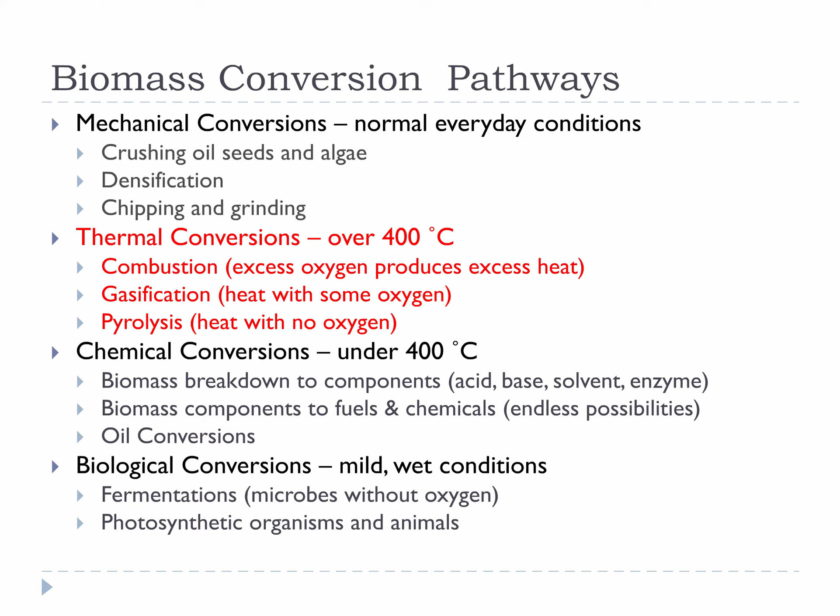Please take a moment to review this week's learning objectives. This week we are covering thermal conversions, our second biomass conversion pathway type. There are many different types of thermal conversion products. Thermal conversions can be used to produce solid, liquid, and gaseous products, and a wide variety of each type depending

on the reaction conditions. Unfortunately, it can also be a very confusing field because a lot of the same products have different names that would lead you to believe they are not even related. Some of the names of common products are shared here, and as you learn more about thermal conversions, you will better understand what they are and what they aren't.

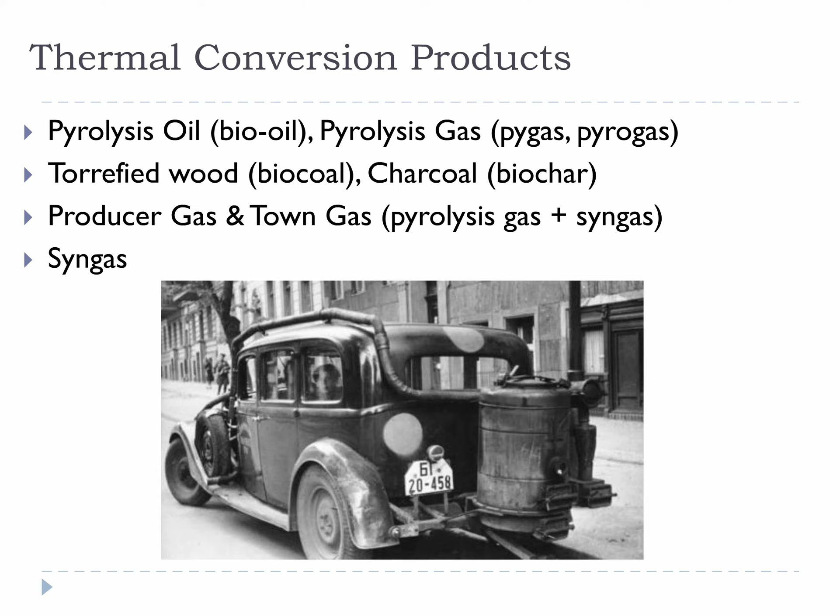I am going to repeat myself here because this is very important. When we think about thermal conversions, it will be important to think about heat and oxygen. This is because heat and oxygen almost completely control what kind of thermal conversion will occur. As you add more oxygen and more heat to the process, you get different types of thermal conversion.

The lowest level of conversion is pyrolysis. It requires no oxygen and just enough heat to start getting biomass molecules to break, so around 400 degrees Celsius. The middle level of conversion is gasification. It requires more heat than pyrolysis, but importantly, it requires the addition of a small amount of oxygen, not enough to combust, but enough to lead to the formation of partially oxidized gas products.

However, each thermal process releases heat as well, so in pyrolysis a small amount of heat is generated, then in gasification more heat is generated, and finally in combustion the most heat is generated.

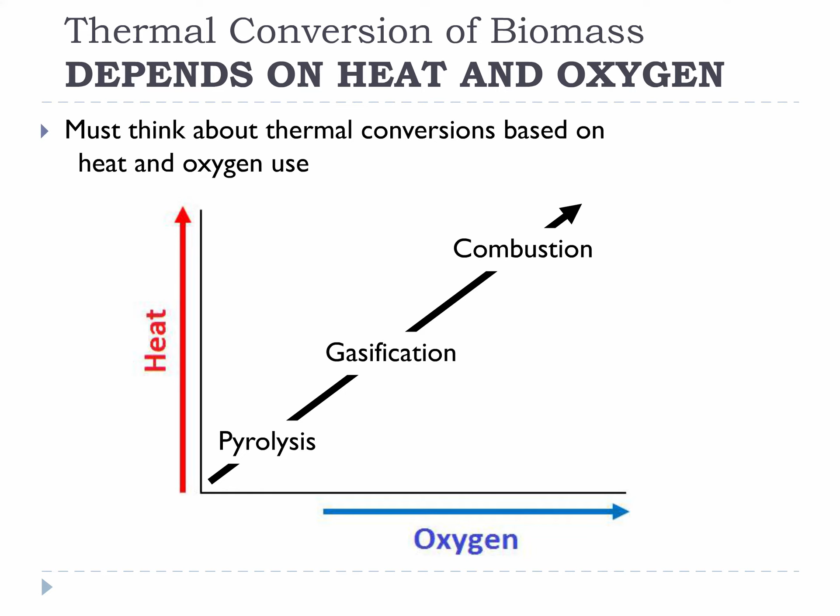The type of thermal conversion is defined by the desired product. If you want heat, you want to use combustion. If you want gas, you probably want gasification. If you want liquids and solids, pyrolysis is most ideal. None of the conversions is really good at making things other than its primary product, so it makes the most sense to figure out what the desirable product is and then find the appropriate process.

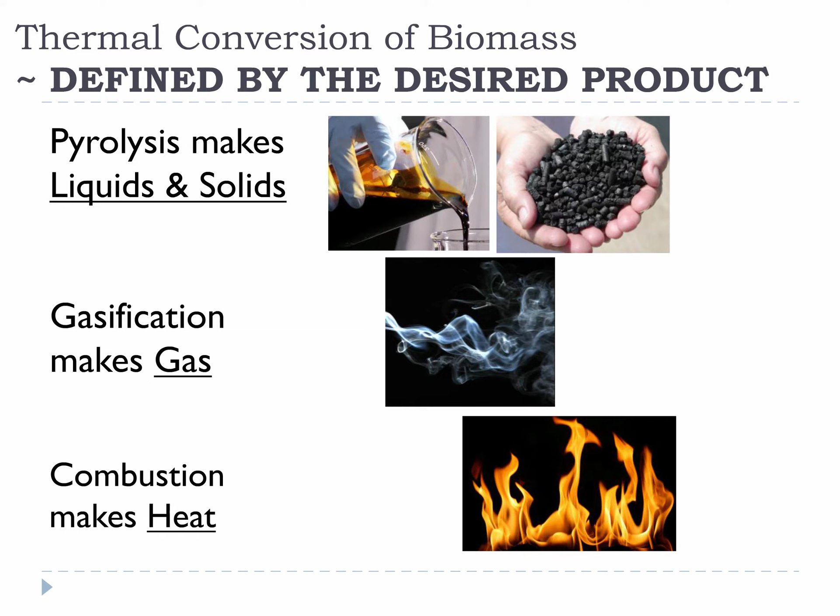Thermal conversions of biomass do not occur in isolation. It is almost impossible to separate biomass pyrolysis, gasification, and combustion entirely. All thermal conversions are optimized for a type of thermal conversion based on a desired product, but that only means that of the various products, the primary product is produced the most. It never means it is the only product. Remember, thermal conversions are a hammer, and their products are often a little chemically messy.

It costs energy in the form of heat to break wood down into a gas through pyrolysis, but as soon as oxygen is reacted with the gas, enough heat is generated from the formation of carbon dioxide and water to continue vaporizing the wood. So the cycle continues and the match burns through its wood until it is all gone and the match goes out.

To do thermal conversions justice, we have to do a little more chemistry. In order to make the diagrams and slides clear, we need to review what the chemical notation and molecular models mean. Please take a moment to read through this list and get acquainted with these very important chemicals and notation.

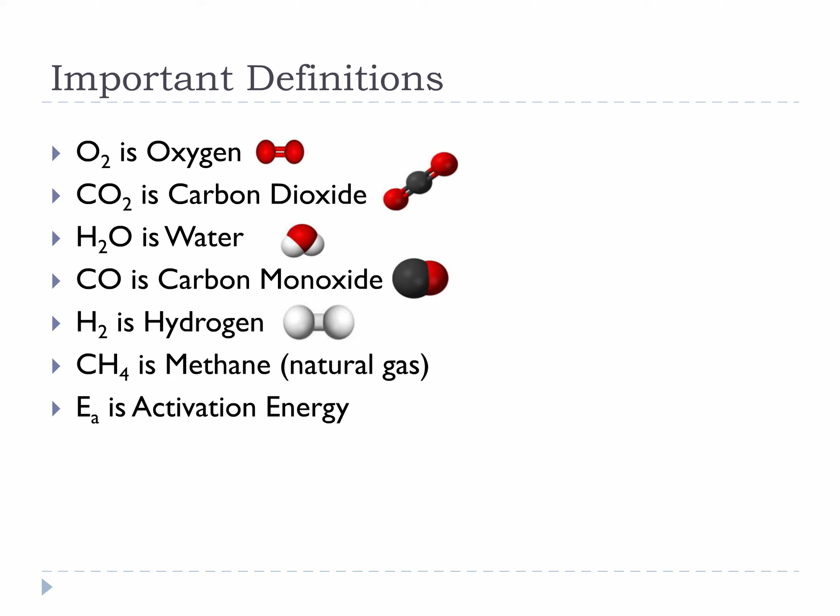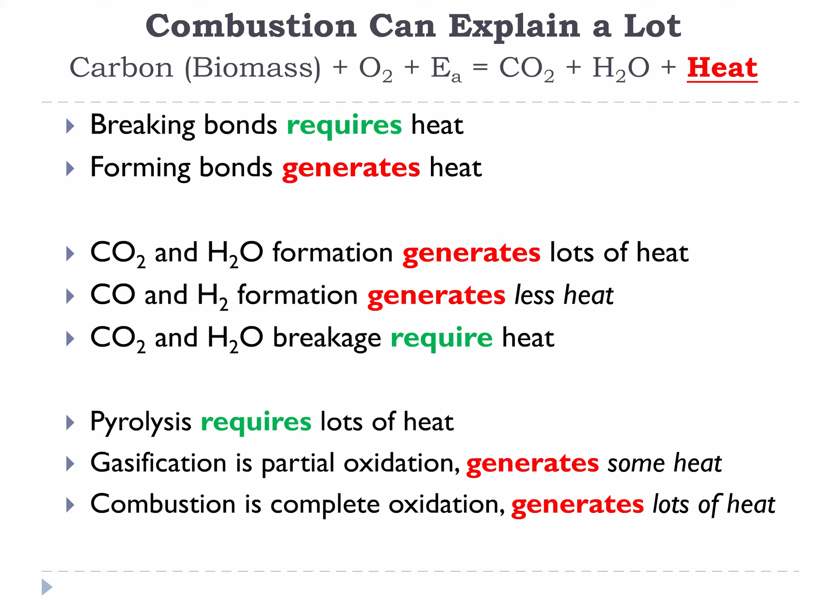Thinking about combustion can explain pretty much every thermal conversion. We will use the equations shown above to bracket all three types of thermal conversion and show how they relate and how they are different in terms of chemical bonds, chemical products, and heat production.

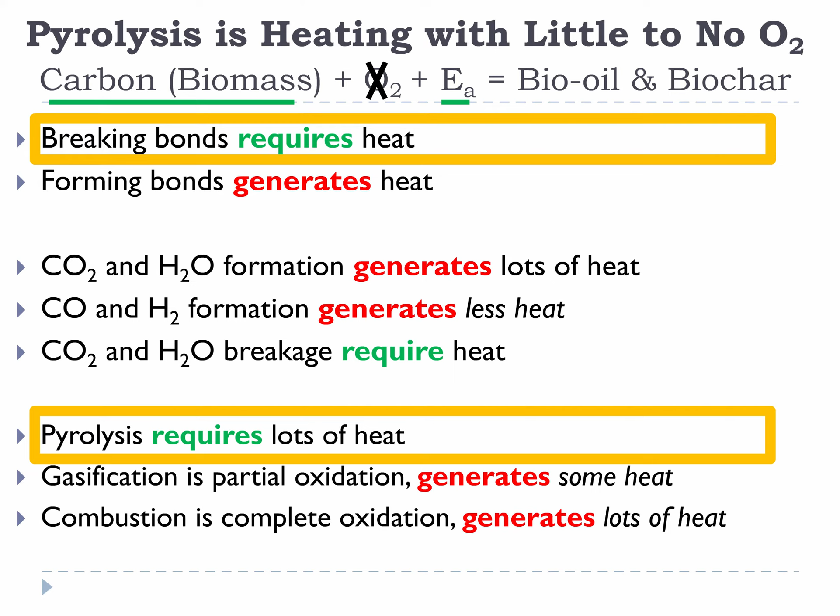Pyrolysis is heating with little to no oxygen. You still have activation energy, but you don't get oxygen, so pyrolysis doesn't get the benefit of forming oxygen bonds to make heat like the other conversions. Instead, pyrolysis is all about breaking bonds, so overall, pyrolysis requires lots of heat and does not generate it in excess.

Gasification is heating with oxygen, but not enough oxygen to make carbon dioxide and water. Instead, gasification forms carbon monoxide and hydrogen. Therefore, it gets some of the heat benefit of the bond formation, but not much. Gasification certainly generates more heat than pyrolysis, and in fact can generate quite a bit of heat if properly controlled, but not enough heat to be a self-sustaining reaction like combustion. Gasification is right in the middle between pyrolysis and combustion.

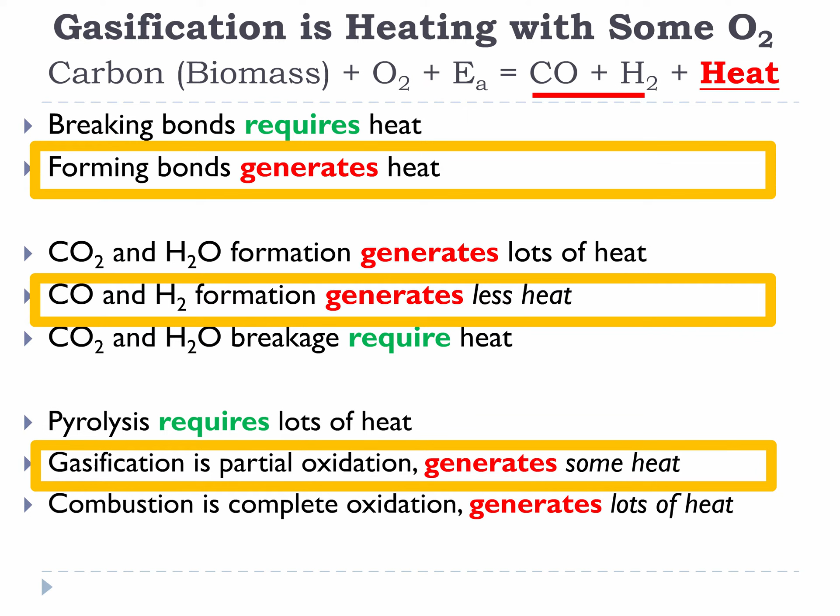Combustion is heating with enough oxygen to get maximum bond formation from the production of carbon dioxide and water. This generates by far the most heat, and enough heat in fact to be a self-sustaining reaction as long as fuel is provided, just like the match.

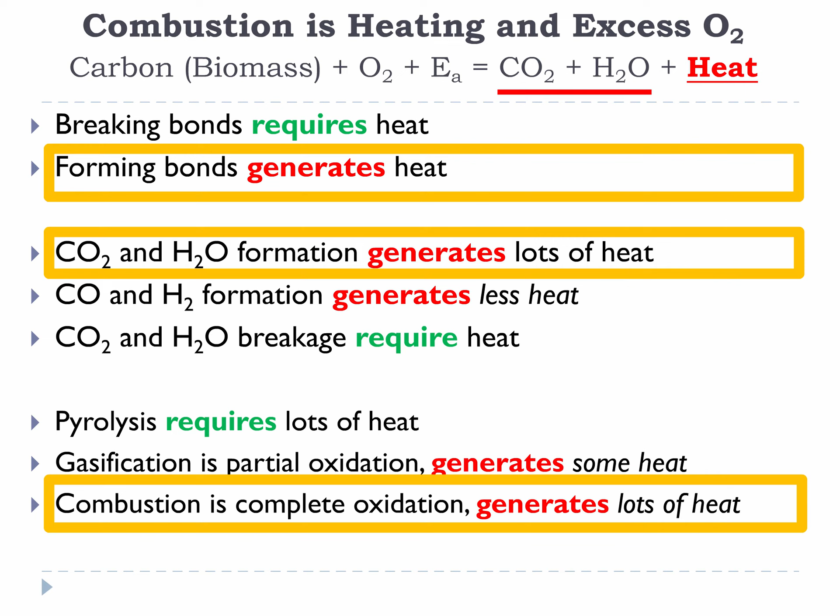Humans use combustion primarily for heat and light. This includes campfires, gas stoves, gas turbines, steam turbine power plants, hot air, hot oil, etc. If you really want to get crazy, look into why light is formed from a flame and how the colors change from combusting different things.

Another good puzzle is where the heat comes from. An increasing number of researchers believe, like Einstein did, that chemical reactions are capable of converting mass to energy at a very low level, and that is why they generate heat. The opposing camp says that this is impossible and has no explanation for the heat. It is a debate that will likely continue until we have the technology to prove otherwise.

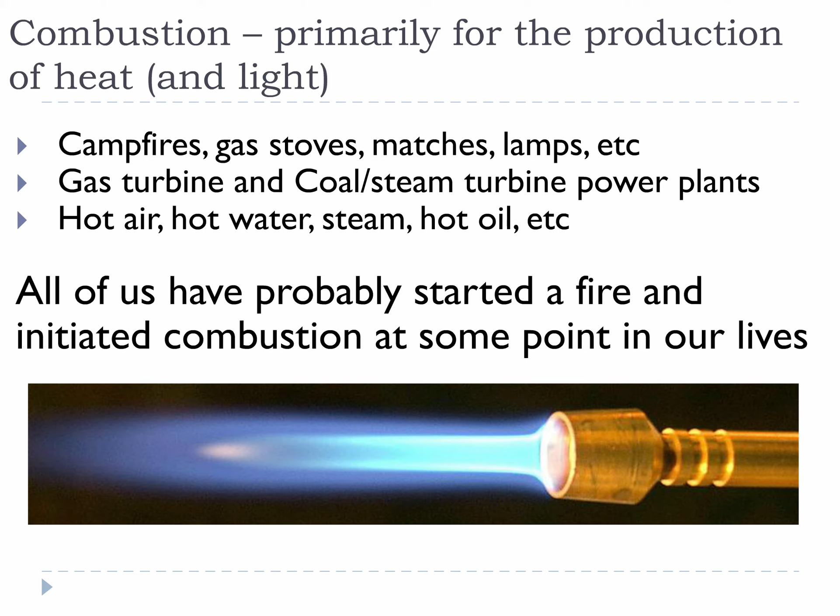In general, it is important that you remember that combustion products happen because of complete oxidation. This means they are primarily carbon dioxide and water instead of carbon monoxide and hydrogen. It is also important to consider what is being burned. If it is carbon-based, these will almost always be the products. But if it is not carbon-based, then there can be a variety of other oxidation products, like sulfur oxides, nitrogen oxides, and chlorides.

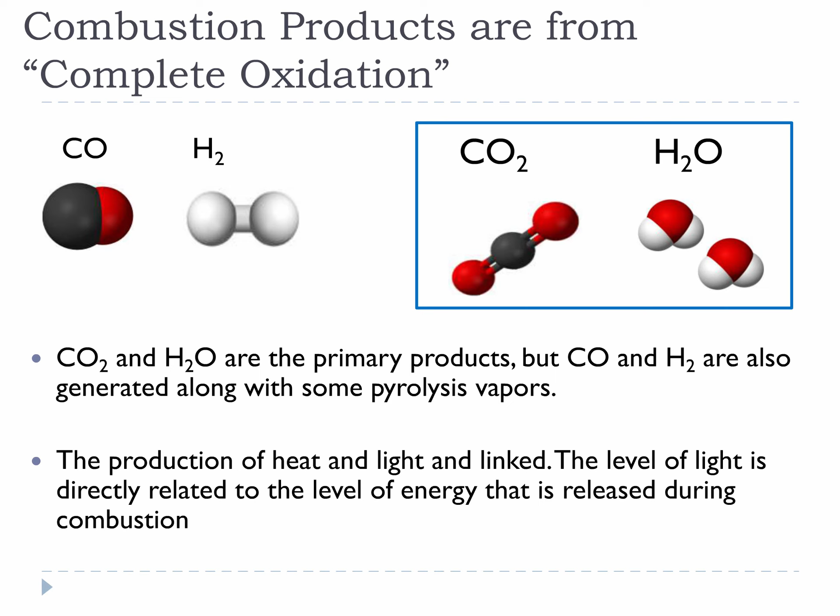I am going to repeat myself again because this figure makes a very important statement about combustion. Despite its age and simplicity, combustion is an ideal energy production reaction on Earth. Without question, the most widespread conversion from an energy perspective is combustion. We live on a planet full of oxygen, and combustion is king when it comes to making energy.

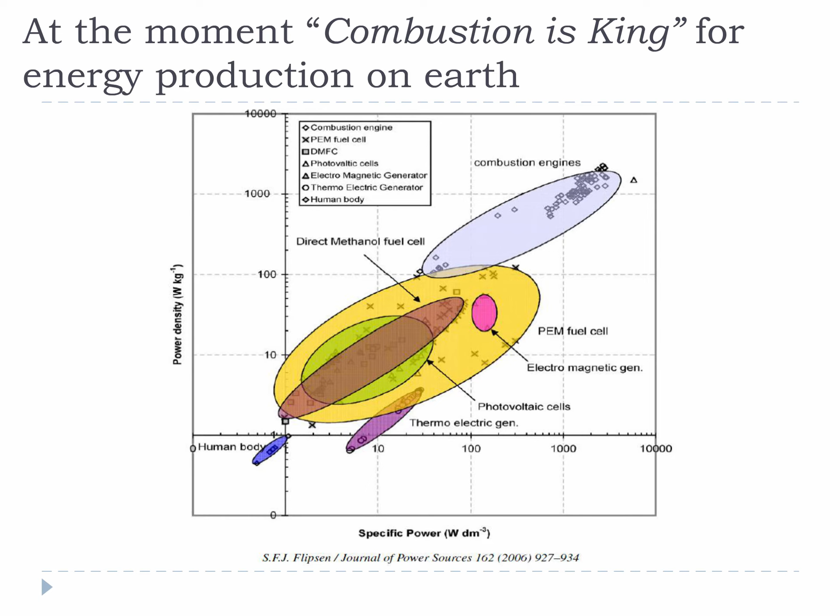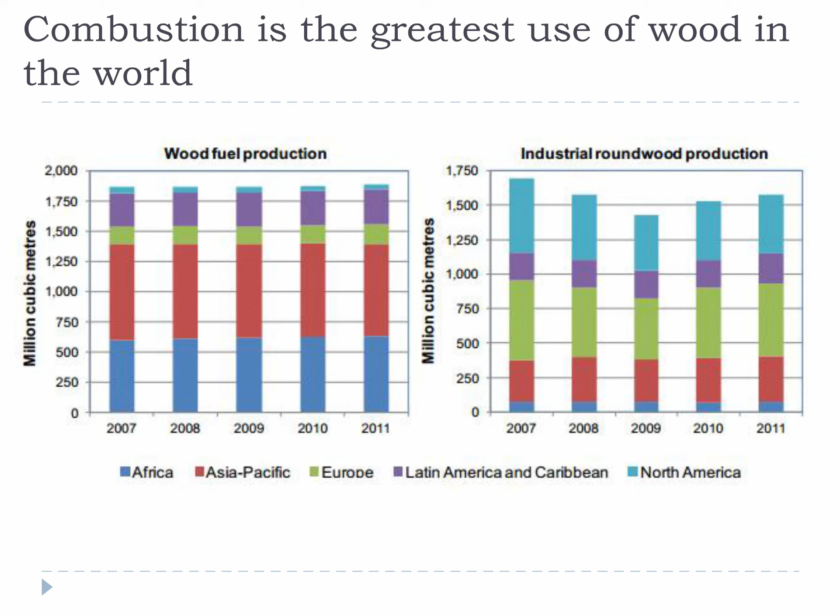Nearly 60% of all the wood produced in the world was used for fuel in 2011. Not for building, not for paper, but for fuel. 60% is an awful lot of wood, and it's hard to believe here in North America since we burn so much fossil fuel. However, in a lot of the world, wood is the only available carbon source, and it is vital for cooking food and providing warmth.

Gasification is primarily used to produce gas, particularly a type of gas known as syngas. This can be done using a variety of different types of reactor configurations known as fixed beds or fluidized beds. The process can also be air-blown, oxygen-blown, or steam-blown.

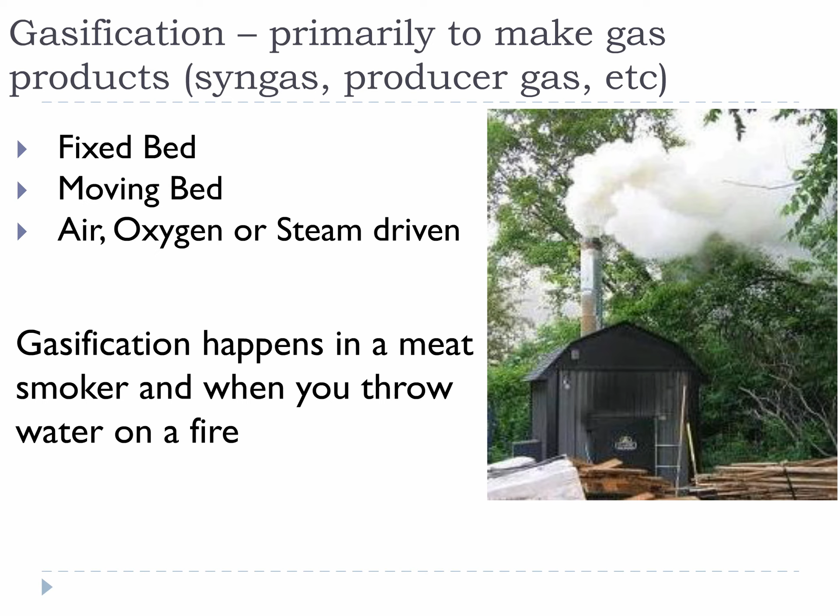Believe it or not, but when you have a campfire and you throw water on it suddenly, you generate quite a bit of hydrogen, because for a moment before the fire goes out, you are primarily gasifying instead of combusting. Gasification also happens in a meat smoker, as you try to find a balance between the pyrolysis that makes the meat taste good and the gasification that keeps the fire going.

These are the products of gasification. Under ideal gasification conditions, only partial oxidation products would be formed, so no carbon dioxide or water would be formed, just carbon monoxide and hydrogen.

Syngas is primarily used for catalysis. It can also be used in turbines for electricity, but its most common use is currently for catalysis and the production of other chemicals like methanol, dimethyl ether, acetic acid, formaldehyde, and paraffins. The most important components of syngas for making chemicals are carbon monoxide and hydrogen.

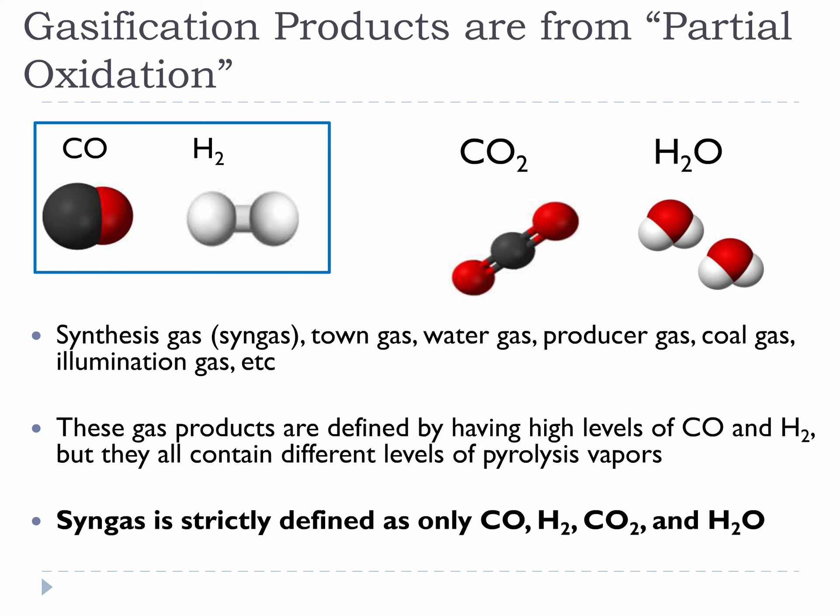If you recall from the history lectures, syngas was used for home heating and cooking before natural gas as late as the 1950s. Humans have been using syngas since the 1800s, so it's not a new thing. We're sort of rediscovering it.

This is an example of the two most common types of fixed bed gasification, updraft and downdraft. If the reaction is done by bottom-up conversion, it is updraft. If the reaction is done by top-down conversion, it is downdraft. Updraft can convert wet fuel, but makes a very low-quality gas. Downdraft needs drier fuel and makes better quality gas.

Downdraft makes a product high in syngas, while updraft makes a product high in pyrolysis vapors. You generally choose the gasifier based on the available biomass and the desired product. There are types of fixed beds other than updraft and downdraft, but they are by far the most common,

largely due to their simplicity. Most of the vehicles that ran on wood in World War II ran on updraft fixed bed gasifiers. These gasifiers generated a pyrolysis vapor that could be utilized by the internal combustion engine. This is in contrast to the people that use fixed bed gasifiers to generate syngas for catalysis. Most of the time, fixed bed gasifiers used for catalysis are downdraft gasifiers because a higher quality syngas is needed.

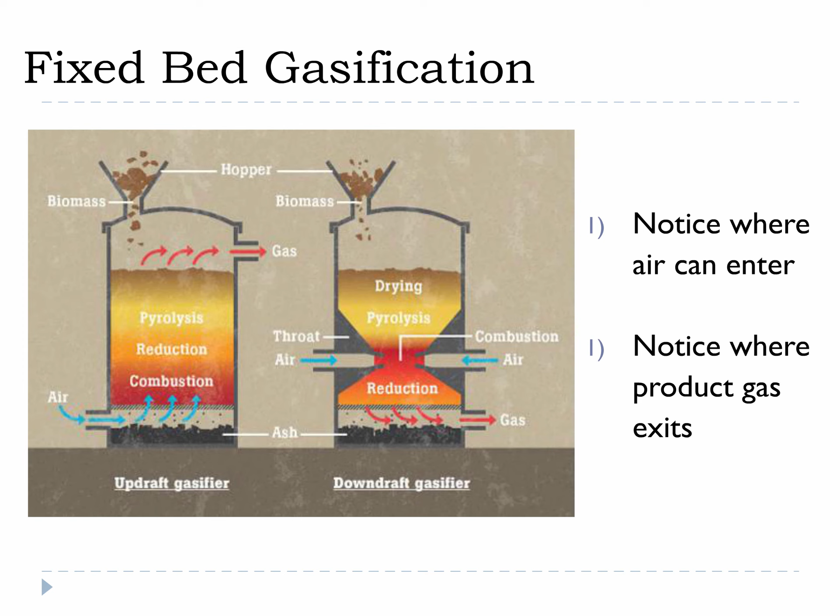This is an illustration of fluidized bed gasification. Moving the biomass and the bed during the conversion supports much greater conversion efficiencies of biomass to gas. Approximately 85 to 95% carbon conversion is possible.

Fluidized beds are much more complex and expensive than fixed beds, but their efficiency is much higher and the quality of the gas is much better, and they can be scaled up much larger than a fixed bed is capable of. So, like all other bioenergy technologies, there are trade-offs depending on the size and type of the biomass resource and the amount and type of product that needs to be generated.

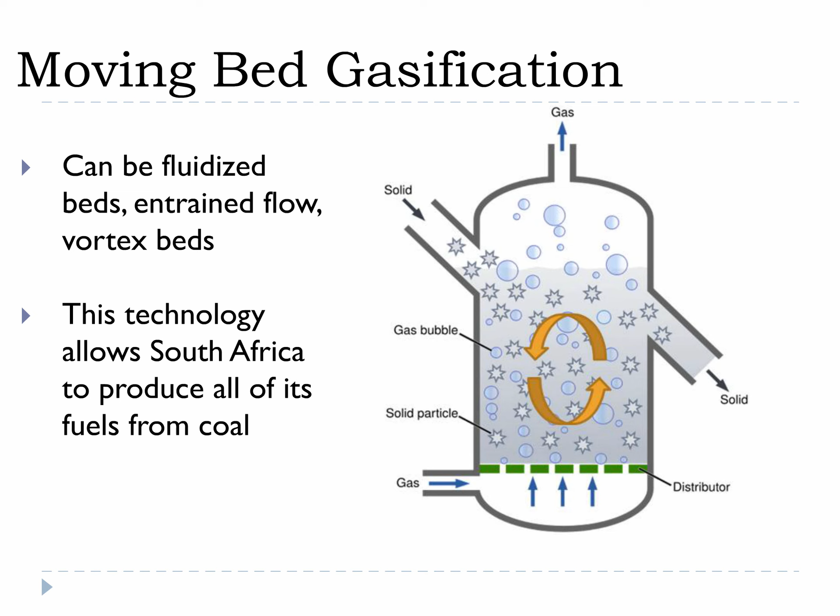So back to the campfire. If you could get the campfire hot enough, you could spray water on it instead of blow air. Burning biomass is commonly done with air to supply oxygen as an oxidant. However, air is not the only source of oxygen. Water and carbon dioxide both have oxygen in them and can be used to burn biomass if the temperature of the reaction is high enough. This is how most of the hydrogen produced industrially is generated.

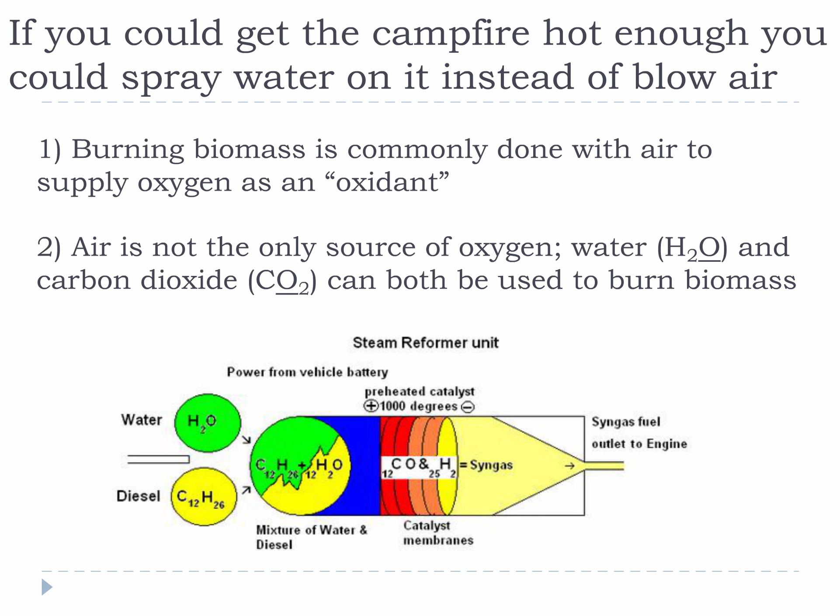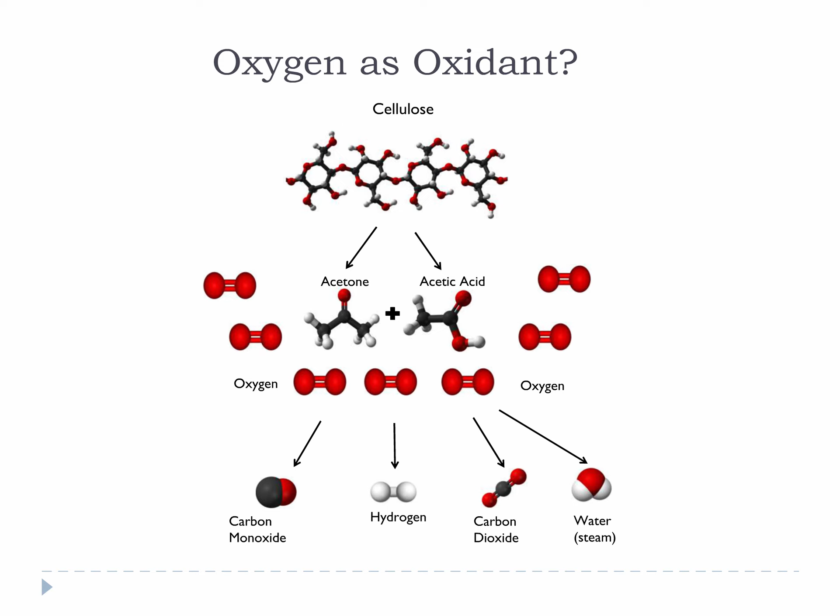This is an illustration of cellulose breaking into common pyrolysis products, acetone and acetic acid. The addition of heat would cause the pyrolysis into these products. The illustration then shows that these products react with oxygen as an oxidant to form carbon monoxide, carbon dioxide, and hydrogen. The addition of oxygen causes gasification.

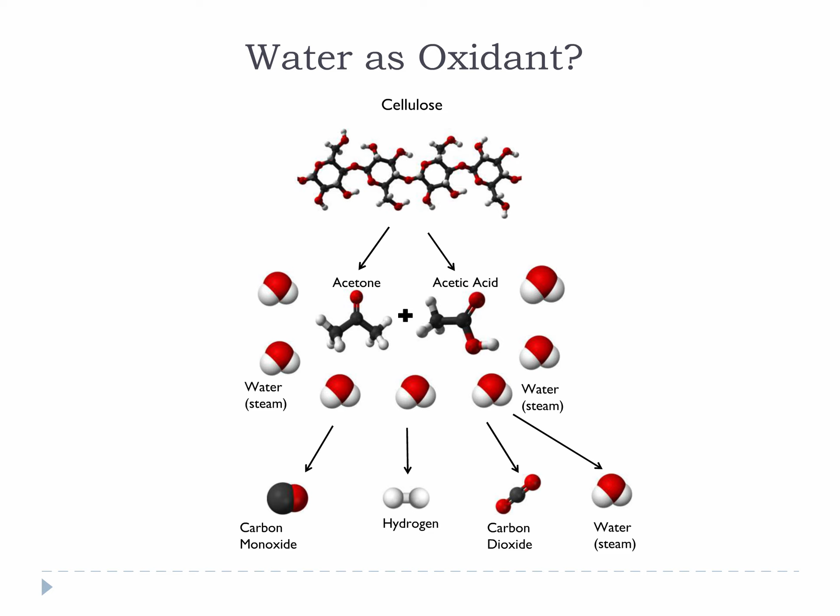Alternatively, these products can react with water as an oxidant to form carbon monoxide, carbon dioxide, and hydrogen. The addition of water in this case causes gasification. This is called steam reforming. Finally, these products can also react with carbon dioxide as an oxidant to form carbon monoxide, more carbon dioxide, and hydrogen. The addition of the carbon dioxide, in this case, causes the gasification. This is called dry reforming.

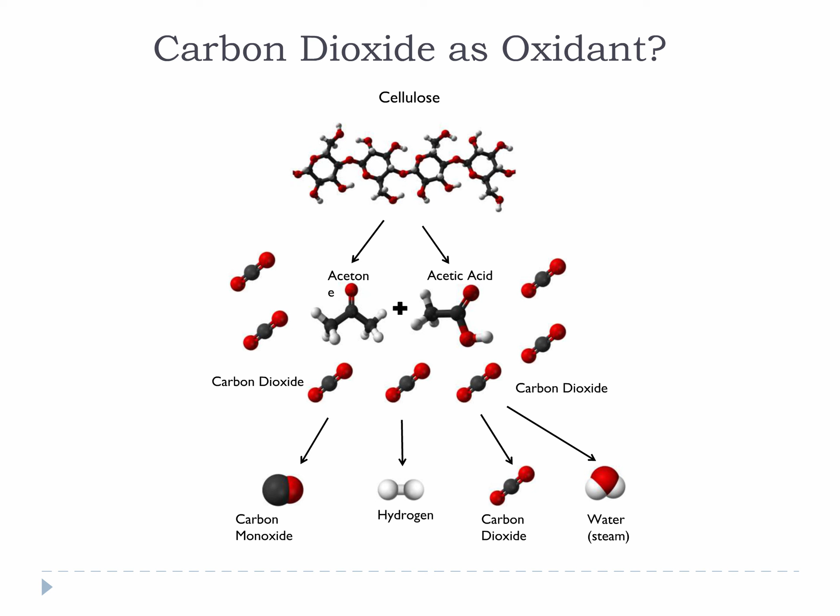When you have an opportunity, please visit the attached DOE Energy Information Administration link on biomass. I would like you to spend some time looking at the data available on this website and making some graphs using the available tools. It is very interesting to consider how much biomass we use for energy compared to fossil fuels, and how much of our renewable energy comes from biomass alone.